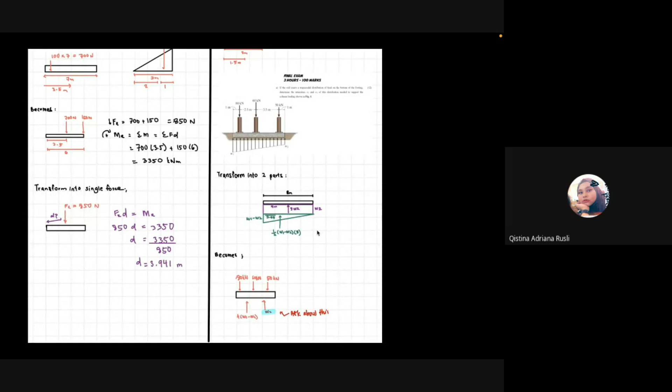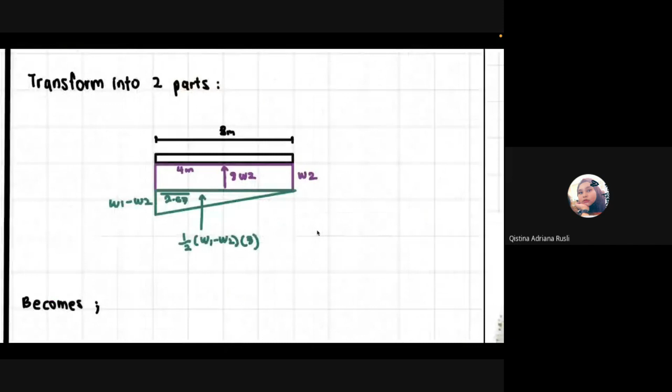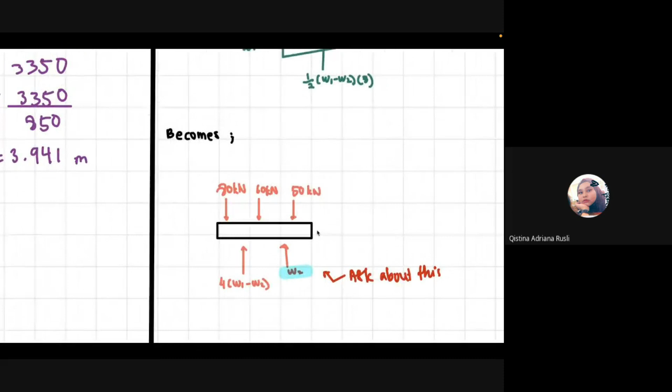Okay, so I have a question regarding this part. This question, when you calculated this distributed loading - it's supposed to be like 8W2, right sir? Yes. And then in the calculation, if you want to transform it into the single force, why does it become W2? Okay, that one is a mistake. It should continue from the step before. It should be 8W2.

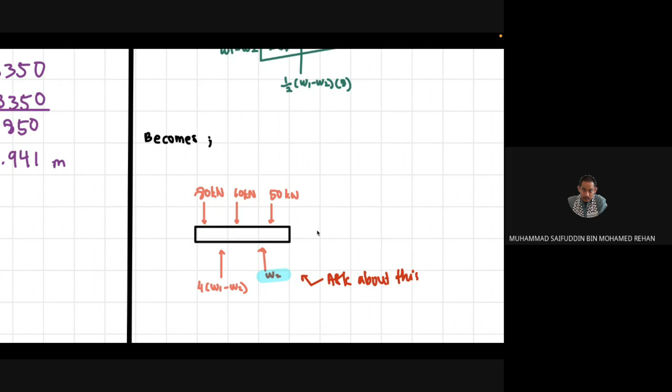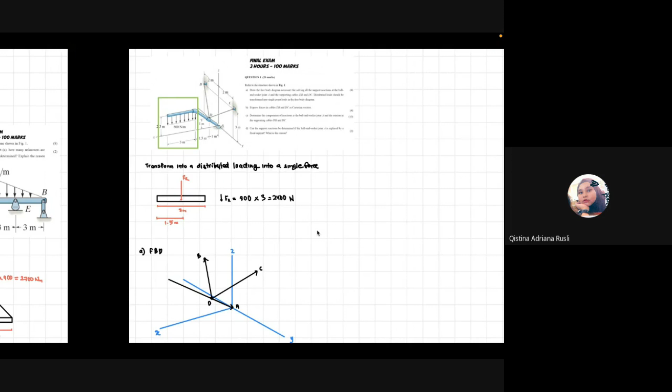And then I have another question regarding this question. I'm quite confused how to actually convert the distributed loading force into the FBD. How to interpret this force into the FBD? Okay, if the FBD, first you have to draw the beam, or the rod. The rod is actually, if you scroll up a bit, it's bent at the AD, and then above that it becomes straight, parallel to the x axis, right?

So that's the rod. So the distributed loading is along the line which is parallel to the x axis there. So basically, if you look from the side, it's basically just like a 2D distributed loading that you have done before.

Okay, the issue is to imagine it or to calculate it, or what? To imagine it. Oh, to imagine it. Okay, before you consider the distributed loading, you can imagine the rod, the whole rod there, the 3D rod. Can you imagine it, how it is in the 3D space?

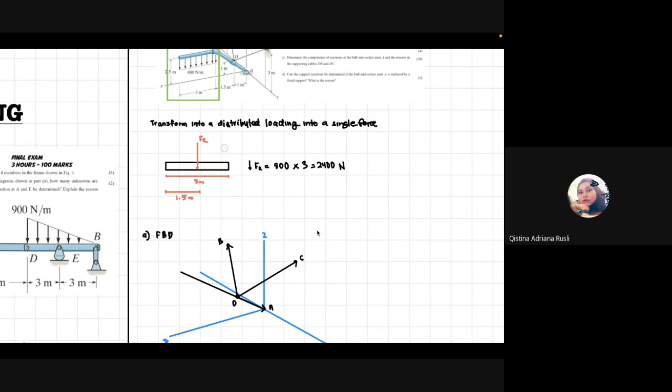Okay, so basically the FR, if we calculate this FR, do you mean like the force should be parallel over here? Okay, for drawing the free body diagram first, because you haven't drawn the rod yet, right? Yeah. So you have to draw the rod first.

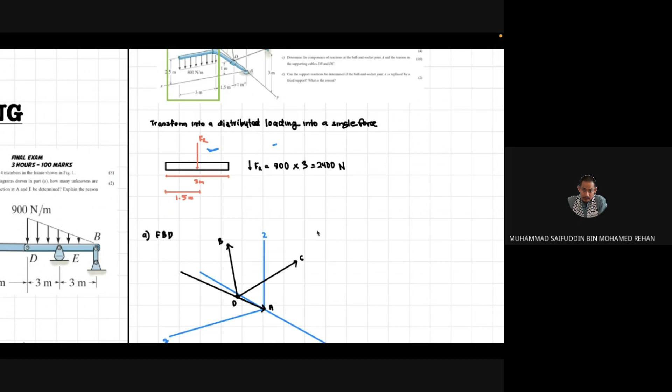Okay, okay. The issue here is, have we covered how to draw free body diagrams in 3D - no sorry, free body diagrams of rigid bodies. That will be in chapter 5. Because especially for anyone taking this course for the first time, the free body diagram we learned in chapter 3 is only for a particle, meaning the body is a particle and the forces act on that dot. But when you have rigid bodies, you have to draw the whole structure or the whole rod.

So this is where, actually for this one, the distributed loading concept is applied in a later chapter, which is chapter 5. So if right now you cannot imagine how to draw the free body diagram because you haven't covered chapter 5, you can keep this question in view and revisit it when we cover chapter 5. For the quiz today, you will not have to draw a free body diagram like this because we haven't covered it yet. But in the final exam, this kind of question can come in, combining what we cover in chapter 4, distributed loading, with chapter 5, like the rod.

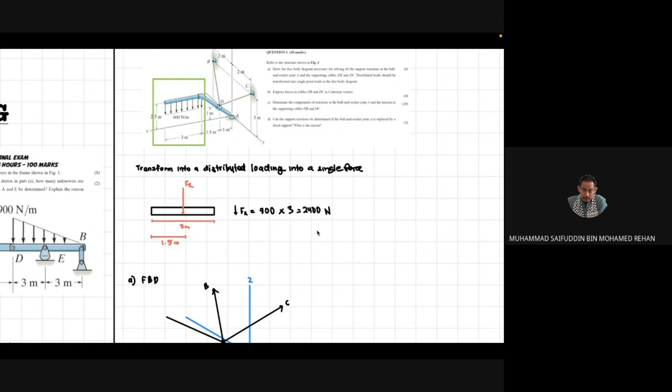Okay, thank you sir. Okay, welcome.